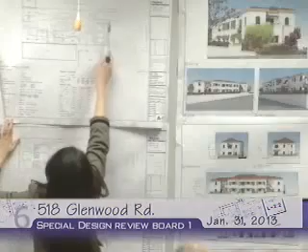I'm sorry, where is that? That's actually located, let me just point it out. This would be the driveway, so it would be in this area here between the driveway and the stairs. Okay. Oh, I see. Yeah, right along here. Okay, in the front setback area. Correct.

If there are any questions for staff, I am available. If not, that concludes my presentation.

And the required guest parking has been provided? No, it's an affordable housing project, so they comply with SB 1818, which does not require them to provide guest parking spaces, only 2 residential parking spaces per unit, in accordance with SB 1818.

I see. How long are those restrictions under the affordable housing? Is that a lifetime restriction? Well, one of the units is affordable, that's all it takes, is one affordable unit, and perhaps the applicant can address that. It's based on the level of affordability; in this case, it's only one unit that would have to be sold to moderate-income households.

It'll be at market rate, correct, and the rest would be at market rate. I believe it's a 75-year period. Is it? I'm not sure, I'm not sure about that for this project.

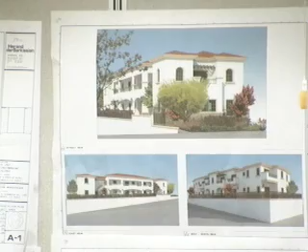The building would be substantially visible going west to east, but you can hardly see it going east to west. These buildings are small elevation-wise—this is a 49-foot lot. With the setbacks, you end up with a building no more than a residence. By the time those trees grow up, you don't see the building at all. There's a very nice existing street tree we're going to keep, and the driveway does not interfere with it.

What else can I say? We have a well above the walkway and some of the front units designed to contain the air conditioners. All the units are sort of lost in the roof structure.

I would be happy to answer any questions you may have, but that's about the extent of it. I have a few questions.

Material-wise—the planters, within the units structure over the parking structure, how tall are those planters? The planters would be 2 foot clear, 2 foot of dirt, to comply with our requirement.

What's the material for the walkways around the perimeter of the building? I think that would probably be some sort of tile—I haven't gotten there, but I think it would be a paver, a tile paver.

And what's the material of the driveway? The driveway is concrete.

And the windows—are they sandwich grid? The grids are exterior grids, not in between. What kind of windows are they? I think they would be aluminum.

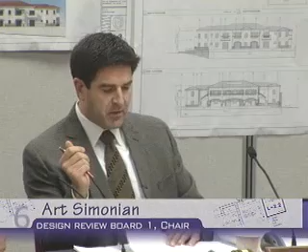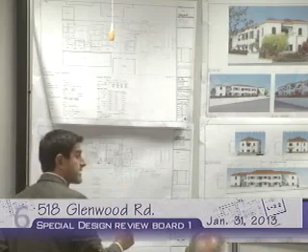Before I provide my comments, I had a question for Mr. Collin, and Ms. Toledo as well, so overall staff — looking at the site plan, as far as exiting and fire department access are concerned, since we're talking about planters on the east side, along here, and as indicated in the landscape plan, these planters are abutting the building and going down. So we're going to have planters here and then planters along the back here, and the access is going to be where the common access to the building is. How does that work with fire department regulations? Will the fire department require a clear path around that deck? I don't believe that was one of their requirements, and we do have copies, if I may, I could pull that out — of departmental comments, but I don't believe they even addressed it, because this was routed to the fire department as well for comments. The reason I bring it up is I don't want the applicant to come back because of something that happens through plan check.

And so while Ms. Toledo's looking that up, Mr. Collin, do you have any recollection of how the fire department has dealt with that, or how building and safety has dealt with that in the past?

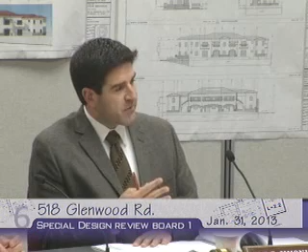Not really. It's more something that comes in line during the plan check process, but typically when these projects go through variances or other discretionary reviews prior to coming to design review board, the other departments are included so that we can get their input, and if they see anything major, those conditions they suggest are included as part of the approval.

Got it. In terms of their specific code requirements, they highlighted fire sprinklers, ladder access to rescue windows, and by the way, the applicant does have a copy of this because it was provided to him prior to the hearing. Additional comments mention adequate separation of required exits, required clearance along exit paths, and maintaining adequate clearance from unprotected openings.

The key is the required clearance from exit paths and ladder access to the upper floor bedrooms. In other words, they need to come up on the side and put up their ladder to get to the second floor. When there are raised planters, that's something I think you're going to have to work through, because it's something that's popped up in stuff I've done, and I'm bringing it up.

No, we can't have cross communication, as you know, anyways. But I was more specifically honing in on that question. I think we've come up with as much answers as we can at this point, this evening, and we'll just let the architect and staff work through that.

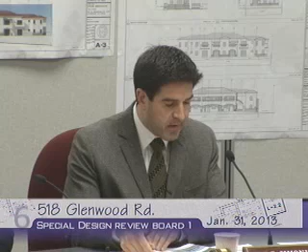And so I think that is a comment. But overall, I support the project. I absolutely understand some of the issues that were raised regarding parking, and that's certainly not within the jurisdiction of this board to really opine on.

So can we actually ask staff to go over the conditions that we have thus far? One, if you want. Well, I'd like to just keep the flow of the hearing going. Let's hear the conditions, and then I will absolutely give you the opportunity to speak.

Thank you. The new conditions the board has brought up are for the applicant to provide details of the ironwork to ensure it's consistent with what you can see in the renderings; to clearly indicate the location of all planters, whether raised or recessed, on the plans; to provide clear section details of the different types of planters; and, as a third condition, that all planter boxes containing trees be at least 4 feet, or would that be 4.5 feet, high. Then a condition to add some level of decorative detailing to the concrete driveway.

The staff recommendation about railings, I believe railings are required. Is that true, Milka? Potentially. Okay.

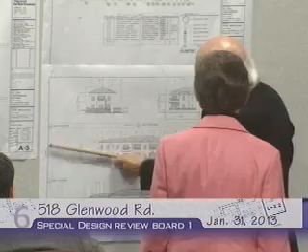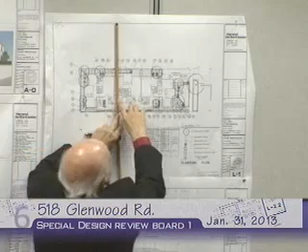From here on, I have a depression, and I'm going to push it down to get as much planter as I want -- believe me, I want the planters. But from here, the section is not showing a depression on the sides. That's because the section's taken through the element, but you know, this is where the side is -- I mean, we're doing working drawings.

The rear continues, so from here on, things are on the surface, essentially. So just to make sure we're all on the same page, these planters, this entire area, are they all on metal?

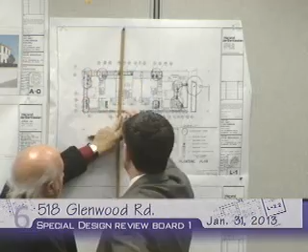This whole thing is depressed. Two feet? From where the pointer is, yes. Everything south of here - yes, the entire slab is depressed, and all the planters are even with the finished floor.

In other words, when you walk, the planter and the top of those planters are in front. The front ones are all on planters - not this one, of course, that's on dirt. They are parallel with - right up here. But how's that, it doesn't show on the elevation.

So he is saying that the planters - when you look at it, you actually see from here. Yes, that's the west wall. This is the elevation, the walkway. So where are those planters?

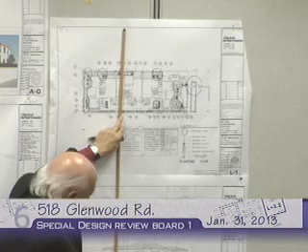Here, that's the planter in there. Here, here - they're not shown. Here, yeah, that's the planter, so to speak. Here's the elevation. I mean, we've shown the planter here. There's the planter.

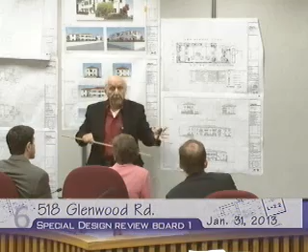And if I'm doing it to get as much planting as possible, that would be - then maybe this portion can become my rail, and I'm done with it. This portion is actually possible.

So what we're looking at is not an elevation. There are discrepancies, yes. Let me ask another question regarding all this, try to help somehow.

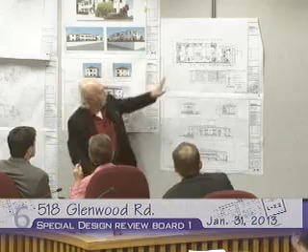Which trees, Ms. Palmer, in the landscape plan, do you think require the four-foot planters? I put the big trees in circles here. And in there, yeah, and the ones in the front, though, are on natural grade - natural grade, so it's not an issue. The big circles, everything - are these trees going to be four-footers, right?

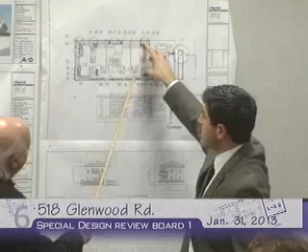I can do that, that's possible. And that's possible, sitting at the podium - above four foot, I think, if you allow me just to do those, I can do that. I can do this.

He said, realize the whole back - let me try to make sure, because your drawings are not matching what you're saying, and so everyone's confused. So we've already figured out six inches below the top, that these are on grade, and then these could be on four-foot planters, and that will work.

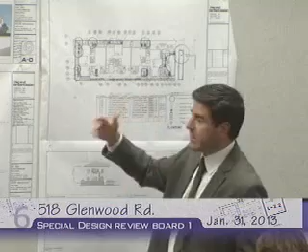I don't have a problem. What Mr. Sarkeesian is pointing out is everything south of this line, which has a depressed planter along the edge. If we provide a four-foot steel planter, measured from the inside, which would pop up two feet - this portion right here, he's afraid that this wall, instead of being 10'6", would be 12'6".

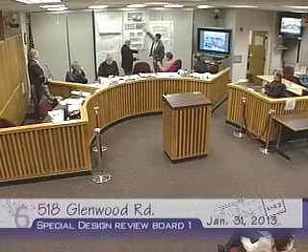I understand, and maybe you don't put trees there. And that's what I'm trying to do, that way, that's fine. I'm telling you, I'm not going to slap - it's not up to me to tell you where to put the trees. No, no, no, but I'm going to slap the landscape architect's hand.

But basically, Chair Simonian, this is not a planter. This drawing is actually incorrect. If we're looking at that - that wasn't clear. This is a traditional block wall, and I can actually push that a little bit more.

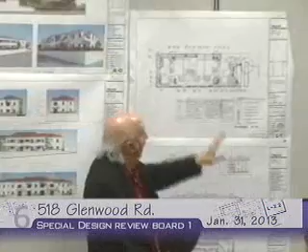I am going in this direction, so three - it has this two feet of dirt, and I can increase that a little bit because I have to slope this to get headroom underneath. As you have it now, you only have eighteen.

No, look, we're doing working drawings, it's close enough for everybody. I'm just pointing out what it shows, what's occurring, so right there.

Same three feet from these there, and whatever I get in here - that's not the issue, if she believes two feet there.

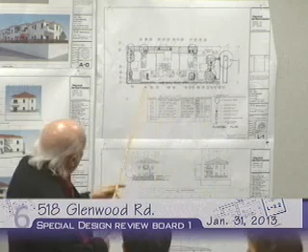Four foot, and Ms. Palmer is saying what she believes is correct, that's what it is now, but it's not going to grow anyway. Why do you need to have trees in that section? I don't - that's my point.

I think that's the easiest way to solve it. The way Commissioner Power fixed it is tied to the tree, and then I will move the trees. It's up to the architect. The biggest problem, frankly, is in here, and I'm even working with that.

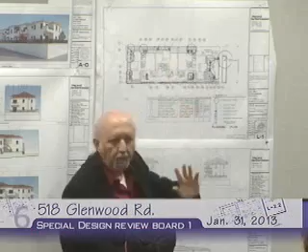He's also required to have a certain amount, 25%. I don't know if that's right, at the... right, 25%? That one. So I was going to say, about a foot and a half. West side, well up, but east side. That was my error. I should not have asked for that.

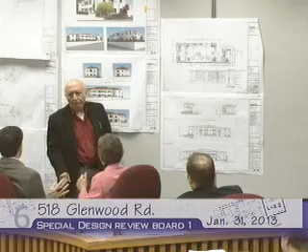I'd like to put a stop to what's happening here at this point, because I think we've all expressed ourselves. Thank you for your time, Mr. Sarkeesian. Let's close the public session again.

If I could try to recap some of the conversation that took place, I think the conditions, we've nailed them. It seems as though we have a good understanding of where that's going. As far as the planners are concerned, Ms. Palmer made a judgment based on her professional experience that any mature trees, in order for them to mature, are going to need 4-foot planters, which Mr. Insua has already clarified should be measured from the inside.

It's up to the architect and the landscape architect and staff to work with one another and come up with a landscape plan that will not increase the height of the walls above what has already been entitled, and the steel planters might not even be perceived as part of the wall, in which case you could perhaps go above it and not even infringe on that height limit.

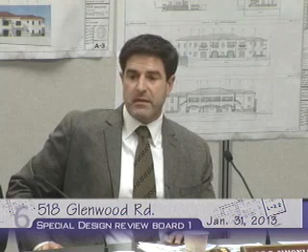And I would just add, in that revised landscape drawing section, that the building sections and site plan are revised so they all work together, depicting the exact boundaries of the depressed areas and the planters, etc., so what the architects worked hard to design will get built. Okay, we'll develop new landscape plans, building sections, and elevations that consistently show all of that. Yes. Okay.

Could someone entertain a motion? I'd like to make a motion to approve the project with the conditions as stated by staff. Do we have a second? I'll second.

Roll call. Board Member Insua? Yes. Board Member Herman? Yes. Board Member Palmer? Yes. Board Member Ellis? No. Chairperson Simonian? Yes. Motion carries.